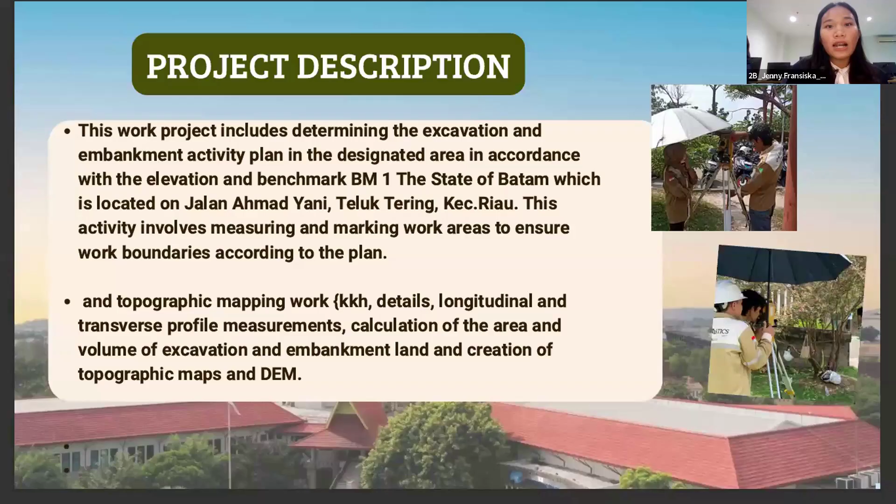Next, project description. This work project includes determining the excavation and embankment activity plan in the designated area, in accordance with the elevation and benchmark BM1, and topographic mapping work, KKH, detail longitudinal and transverse profile measurement, calculation of the area and volume of excavation and embankment land, and creation of topographic maps.

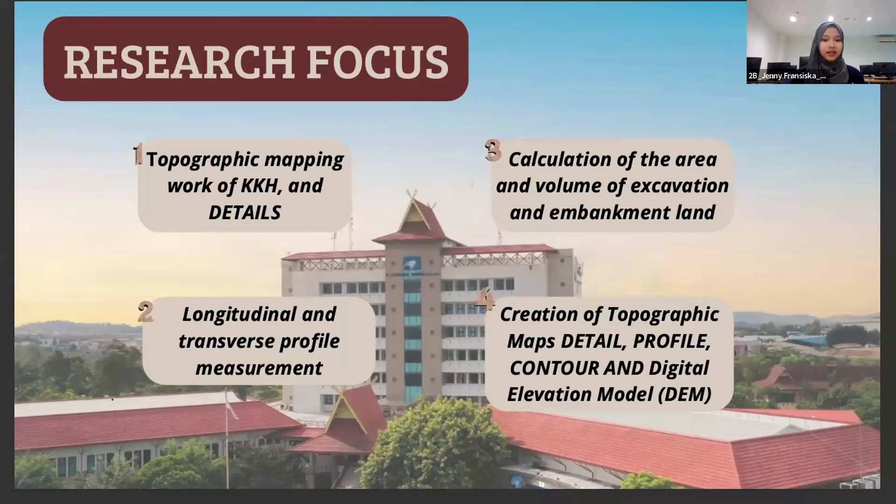Next, research focus: 1. Topographic mapping work of KKH and detail. 2. Longitudinal and transverse profile measurement. 3. Calculation of the area and volume of excavation and embankment land. 4. Creation of topographic map detail, profile contour, and digital elevation model.

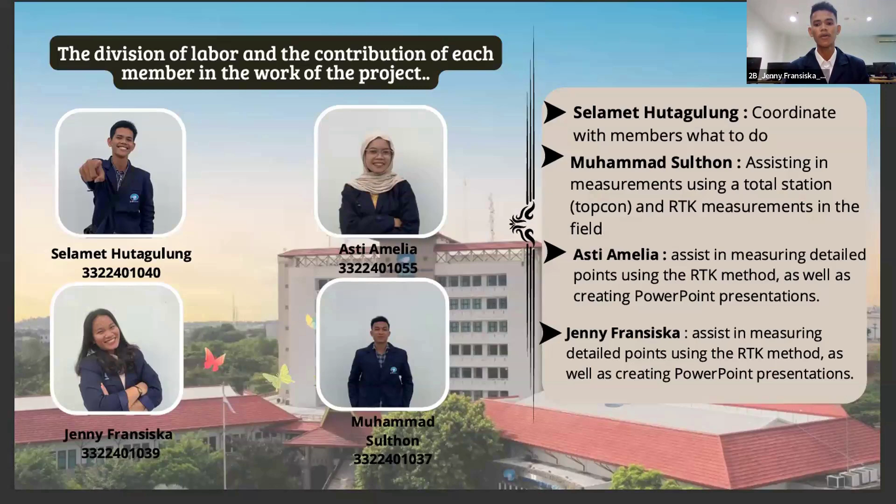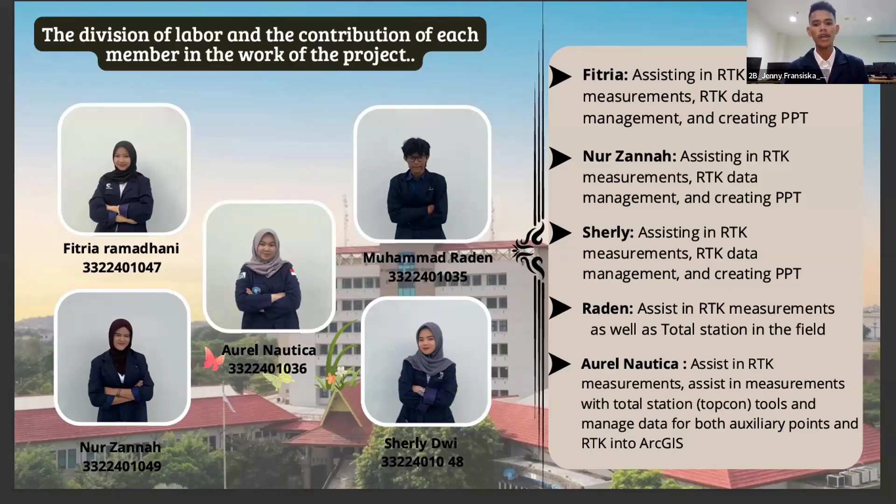Fitria assists in RTK measurement and RTK data management. Nur Zannah assists in RTK measurement. Sherly assists in RTK measurement and RTK data management. Raden assists in RTK measurement as well as total station work in the field. Aurel Nautica assists in RTK measurement and assists in measurement with the total station, and manages data for both auxiliary points and RTK into ArcGIS.

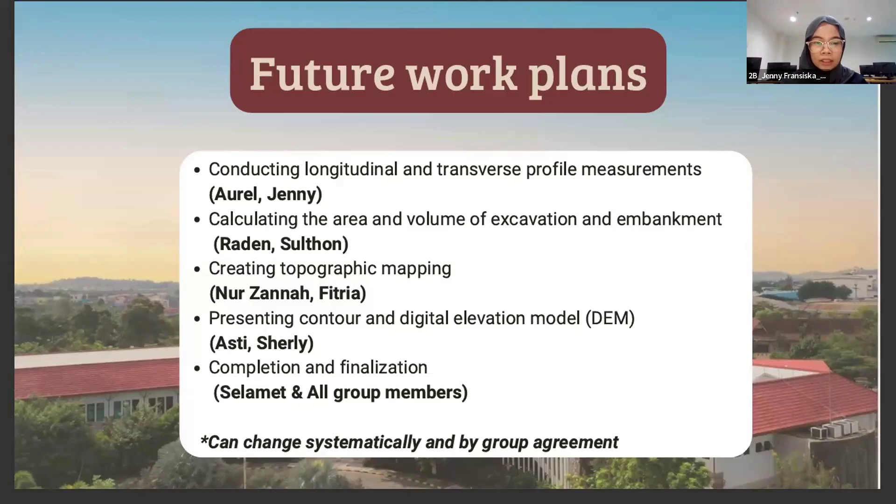Next, future work plans: conducting longitudinal and transverse profile measurement by Aurel and Jenny, calculating the area and volume of excavation and embankment by Raden and Sulthon, creating topographic mapping by Nur Zannah and Fitria, presenting contour and digital elevation model by Asti and Sherly, and completion and finalization by Selamet and all group members.

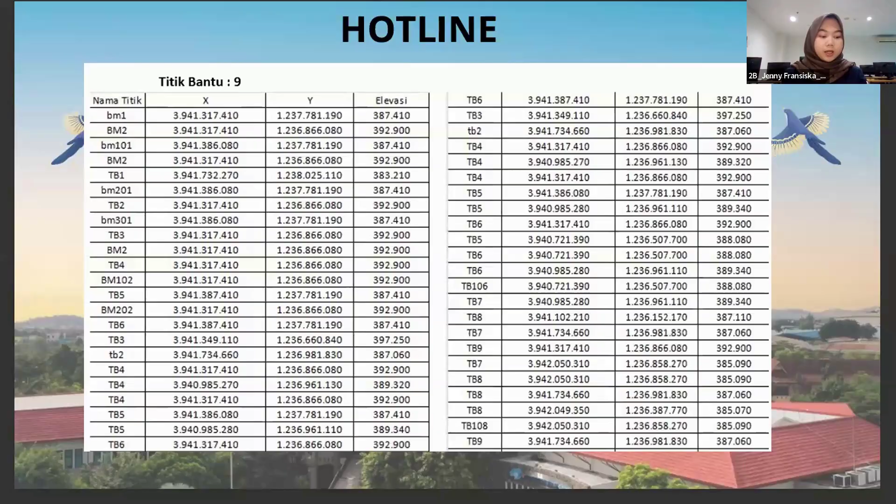And next is the R hotline. We have 9 hotline points and 2 benchmarks, and here we have some details. There we get 112 sidewalk points, 73 road points, and finally there are 6 points in the building area.

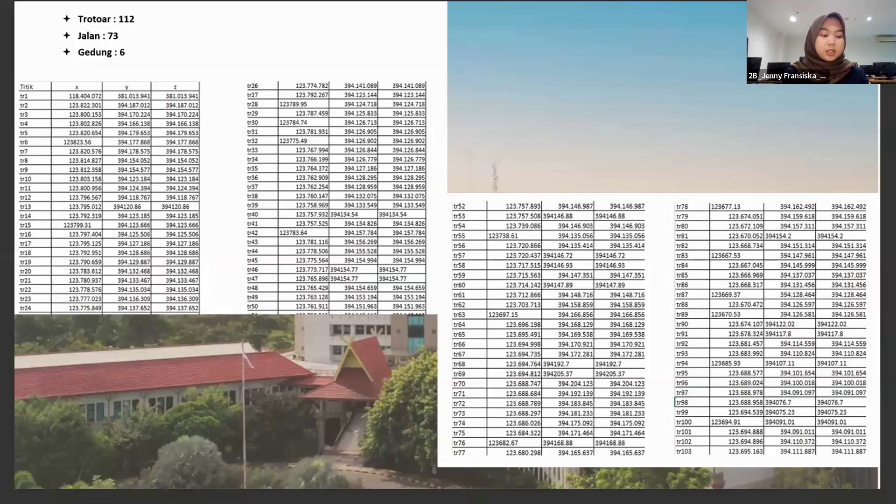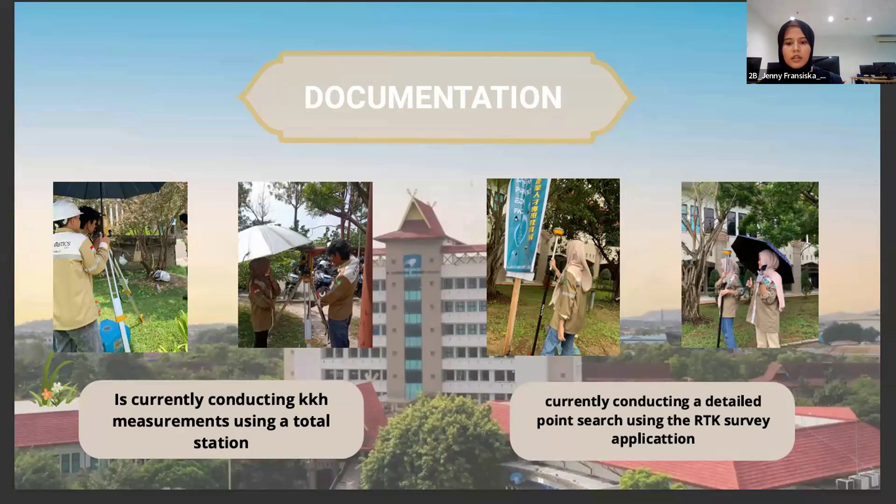Next, this is the documentation. This is the current condition of the KKH measurement using a total station, and this is the current condition of detail point searching using the RTK survey application.

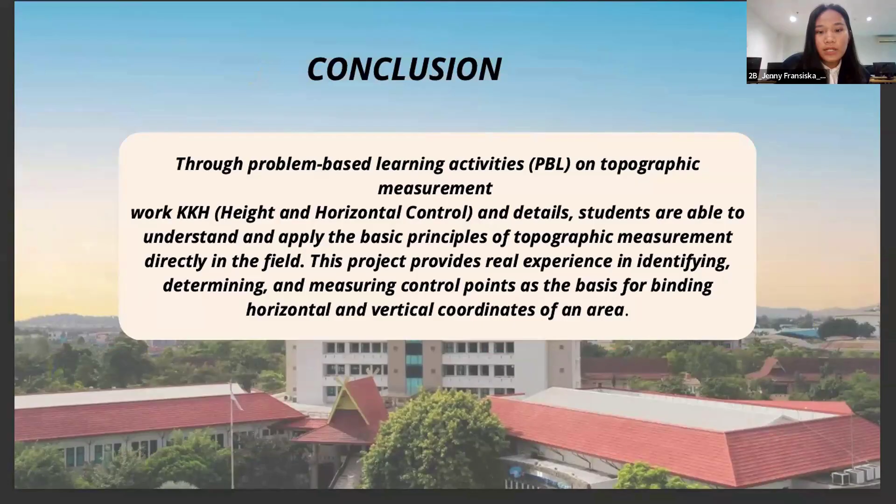Then the conclusion: the problem-based learning activity PBL on topographic measurement, work KKH, and details shows that students are able to understand and apply the basic principles of topographic measurement directly in the field.